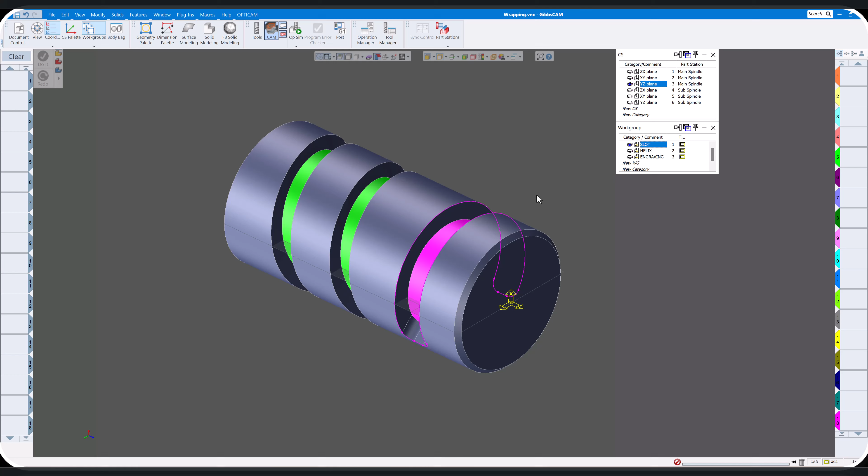Right click, go to extract edges. We'll leave that at 0, and there's our first wrapped geometry. Now this is just the geometry off the part - it hasn't been unwrapped yet.

So the next thing you want to do is select this, go to modify, go down to where it says unwrap - it's already been wrapped because it came in that way from the solid. Click on unwrap, and make sure you put the radius of the part. You want this on the top - this is a 3-inch part, so this will be 1.5 inches. Click on do it, and you'll see now this geometry is unwrapped.

Now if you want to get some dimensions on here, you can dimension this. We'll just dimension this right here - you can see that's 5/8.

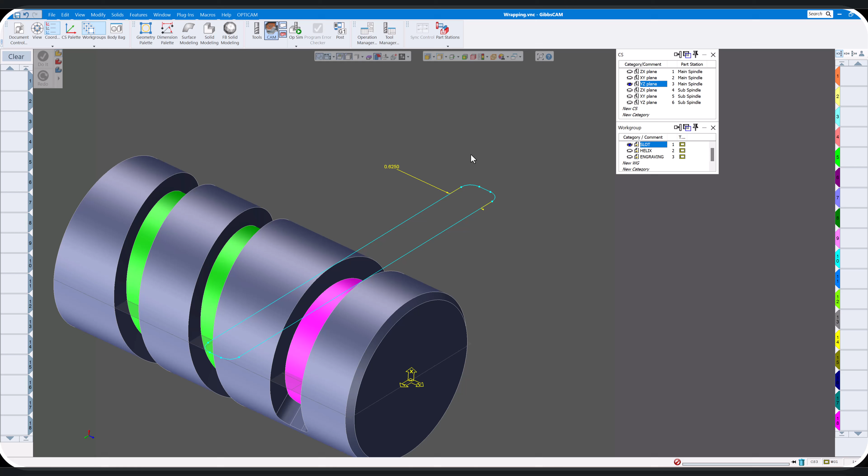Now if you want to know what the radius is on the part, notice I'll click on here to get the radius, and I'll click on here, but nothing happens, nothing shows up. So what that tells me is it's a B-spline. If you want to see if it's a B-spline for sure, hold the control key down, press L, and you'll see it labels everything there in Gibbs. You can see this is a B, so that tells me that's a B-spline.

So you don't have to convert this to arcs, but if you want to, here's a way to do it. I'm going to turn labels back off for a moment. I'm going to select this geometry, go out to modify and down to segment spline. I'm going to say make these arcs, and I'll give you 1,000th accuracy. So we'll click do it.

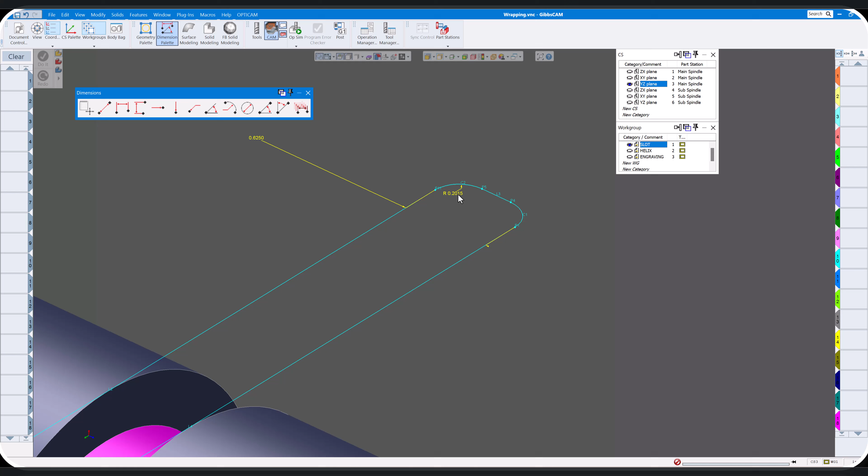Now if I turn Control L on, you'll see this is a circle now. Like I say, you don't have to do that, but there you go. So that's about a 0.2016 wide there. Okay, let me turn off those dimensions and Control L.

Okay, so let's create a tool. I already have my tools in here - I'm going to use a 3/8 end mill to do this. But one thing you want to do is there's this button right here that says wrapped work groups, and if you click on it, you'll notice it doesn't do anything. That's because this is not wrapped - we unwrapped it, but it needs to be wrapped in order for Gibbs to cut this slot.

So let's go to this slot here, right click, go to WG info, and make sure you click on this button that says wrapped. Now notice when I click on here, it wraps it around the part.

Remember, this is just a visual. It's not doing anything—it's just showing you what it looks like when it's wrapped versus unwrapped. So you don't have to have this wrapped when you start to put your geometry or toolpath on there. This is just a visual, okay?

So let's create a contour. Remember, this is not turning, it's contour milling with that end mill. The first thing I always do is go to the rotate command or tab and make sure we're on the correct coordinate system—in this case, the YZ plane. And we want to do, of course, polar and cylindrical.

That's good. Okay, now our part is 3 inches in diameter. Remember that this blue line here represents the center of the spindle—whether it's a mill or lathe, doesn't matter. So our stock is 1.5 inch radius, so 3-inch diameter.

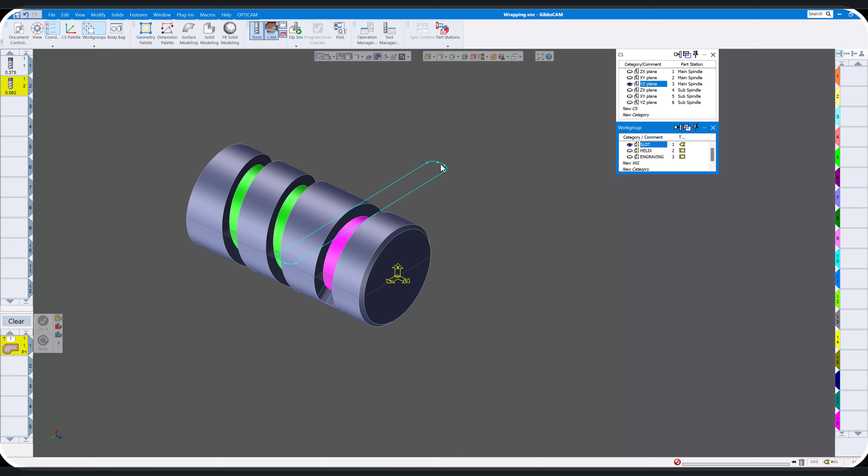Rotate's all good, polar and cylindrical. So now you can choose which side you want to start, whether there or on the end—that's totally up to you. I'm just going to start right here. Of course, click on this again, click on the inside there. If I can get that to take... okay, there we go. And click on do it.

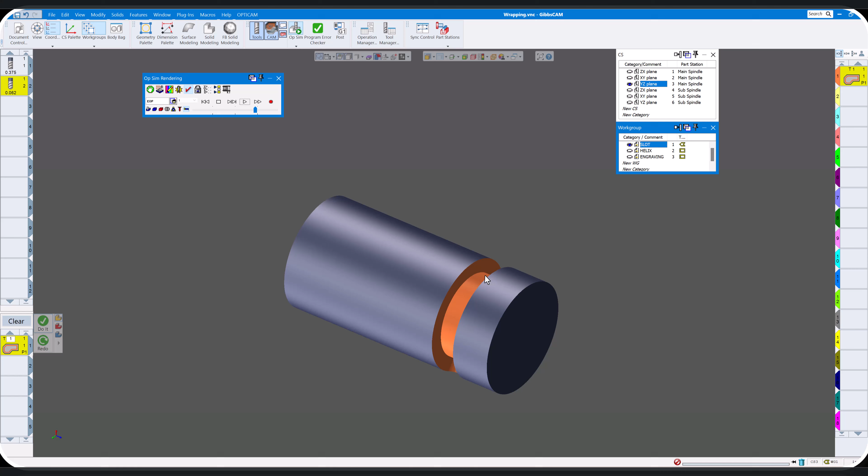And now you'll see it's wrapped around the part there. So let's do a cut part render and see where we're at. One thing to remember with polar and cylindrical: the tool will always be pointing to the center of the part. It's not going to shift off any amount in Y or anything else—this is always going to be to the center, so keep that in mind. You can use the other processes if you need the Y-axis to move off center, depending on where the end happens to be in relationship to the diameter of the tool you're using. So that looks pretty good.

Okay, let's close this. So now let's do the helix. I'm going to go to my work group that says helix. I'll just use an empty tile there to make our toolpath disappear. And again, YZ plane, helix. I'm going to just double check here to make sure that's not clicked—it's not. So again, right click, extract edges, and there's our helical geometry there.

And again, I'm going to select the geometry—let me turn off my cam. I'm going to select the geometry, go to modify, and again, unwrap. And again, the radius is going to be 1.5 inches because our part's 3 inches diameter. And there I have my unwrap geometry for the spiral.

So now, as you can see, this button up here isn't doing anything yet. So I want to go to my helix work group, right click, click on wrapped. Now notice if I click on this now, it shows you wrapped and unwrapped. Okay, pretty good. Open up our cam again.

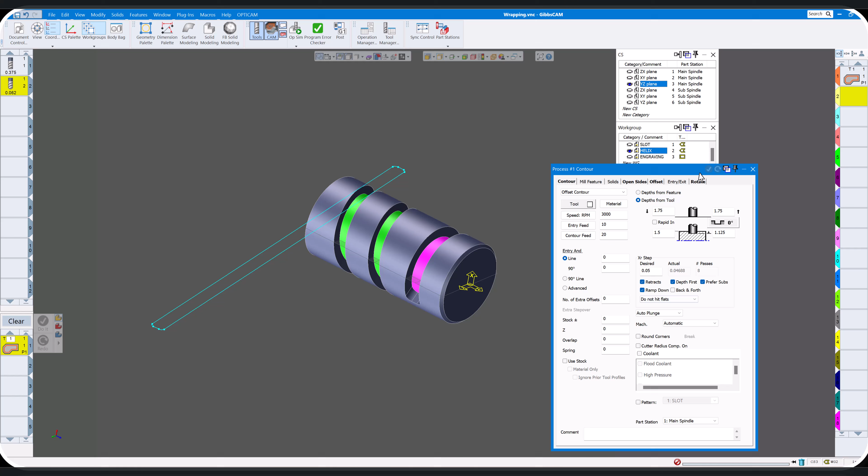I'm going to use the same tool and basically everything here is the same—ramp down, all this stuff. So again, you can decide where you want to start, that's up to you. And we'll click on here, we'll climb mill and click on do it. And now we have our helical spiral in there. So let's play.

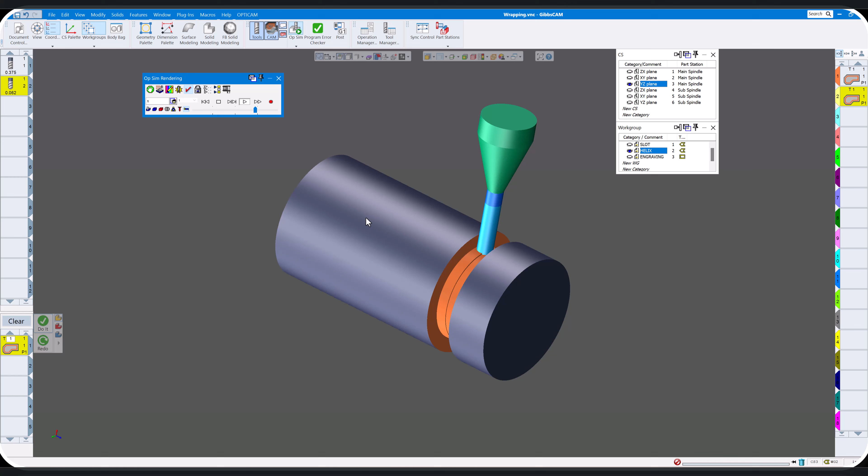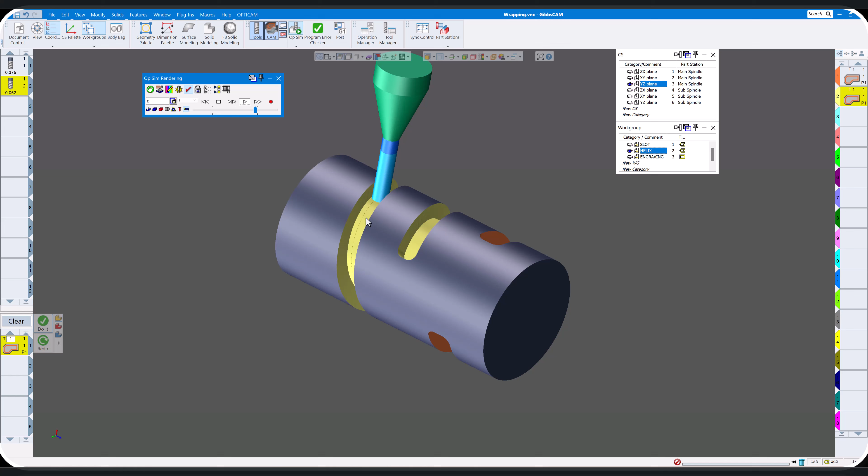And of course, when it gets to the bottom in Gibbs, it'll stay at the bottom without ramping in when it does the final pass. And our final pass. Okay, so you can see now we have the partial slot, and our helical—all looks really good.

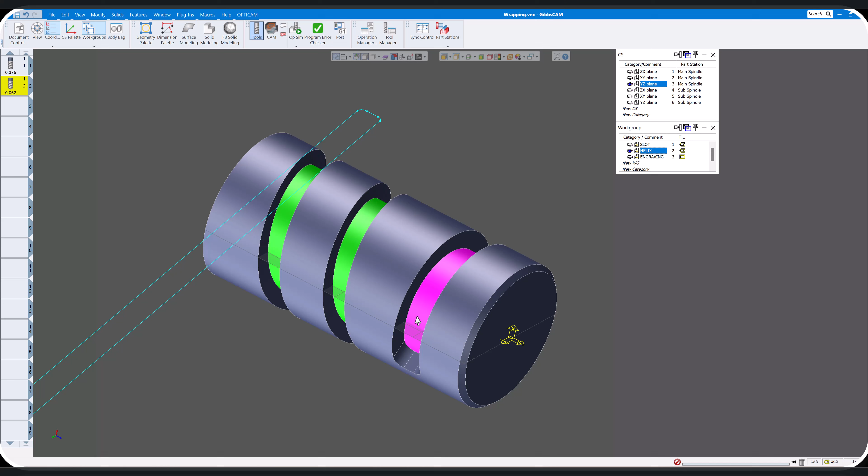Okay, that was 2 examples of if you bring in a part. Turn off some of this stuff here. Bringing in a part that already has the geometry, or the model already has what it wants to be, like the wrapped polar and cylindrical already in there. So that's why you need to do the opposite: first unwrap it, go to your work group after you've unwrapped it, then check this box. Don't do this before, otherwise you might get a double helix wrapping around there, so don't do that.

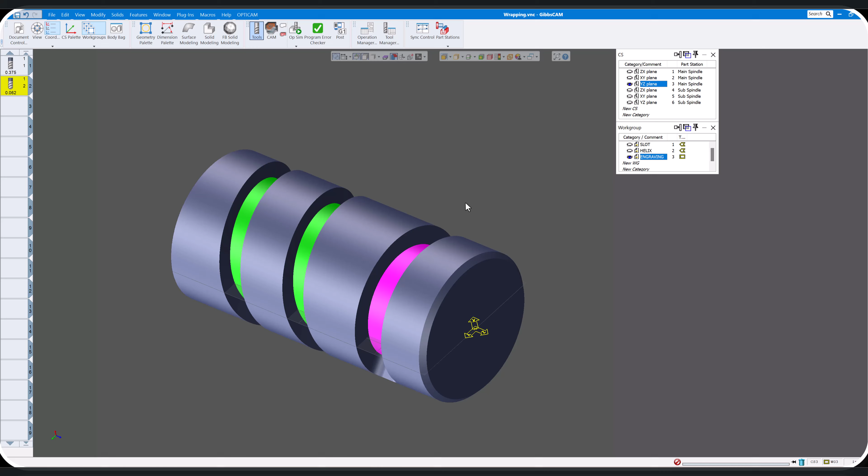Okay, let's go to our last one here, which is engraving. I want to engrave some numbers on the outside of here. Now, of course, you'll see—let me turn off edge selection—there's nothing in the solid model already, so I can't unwrap it. I don't need to unwrap it. So let's just go to our geometry palette.

Let's go to our engraving, and I'm going to choose more part. The reason I choose more part is it's just stick figures, made up of G1s, G2s, G3s. Any of these others you choose will all be splines. Of course Gibbs will engrave it just perfectly, but your code's going to be a lot longer because these are all made up of B splines.

I haven't really seen any others in Windows that are not B splines. So just keep that in mind.

We're going to go half inch back, 1.5 inches on the X, because remember our part's 3 inches in diameter. And center - usually I have the name wrapping, but usually I put some spacing in there, otherwise sometimes the end mill overlaps the other geometry, so usually I'll put a space in there. So if I click on Do It, you'll see I have my geometry nice and flat, even with the 1.5 inch radius there.

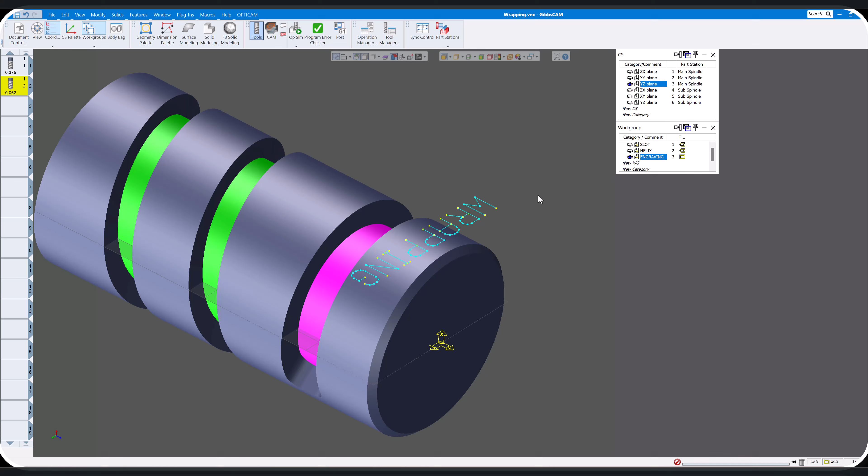Now, instead of unwrapping, this time I want to wrap it, and you don't really need to go here and wrap it here. We're just going to go right to engraving, right click, go to WG Info, make sure you click this button that says wrapped. Now if you click this button up here, you'll see it wrapped around the part. Looks perfect. Okay, open up our cam.

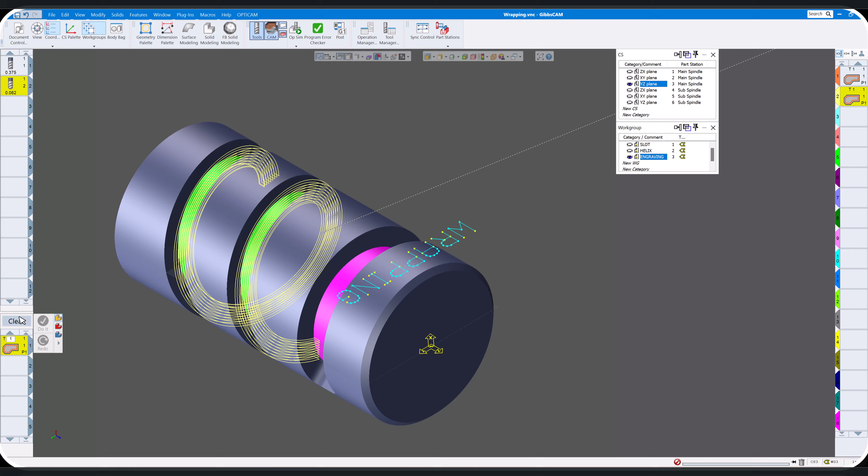This time we're going to use the 1/16 ball end mill. I find ball end mills work a lot better when engraving because it doesn't leave burrs, but if it's really small lettering, you need to use an engraver, then it usually brings up a little burr, but if you can stay with a ball end mill, you'll be a lot better off.

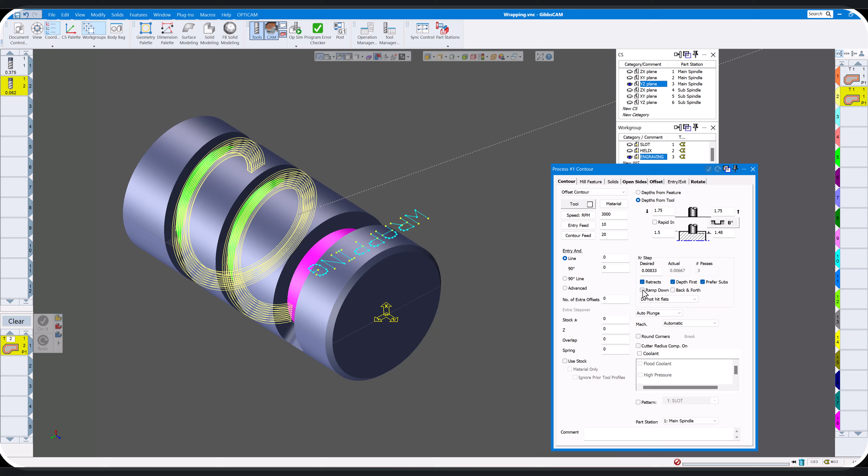Okay, so here we have 1.75 is our clearance, 1.5 inches is our material. I don't want to engrave that deep, so I'll put in 1.480 there. No entry and exits, nothing like that. I don't want to do a ramp down. And make sure, of course, you're on the right plane, polar and cylindrical.

Now, easy way to do this is just turn off the solid, just hide the solid. Choose an empty tile over here, okay? And I'm just going to hold the Shift key down, put a window around the engraving, and click on Do It. And you'll see when we render this...

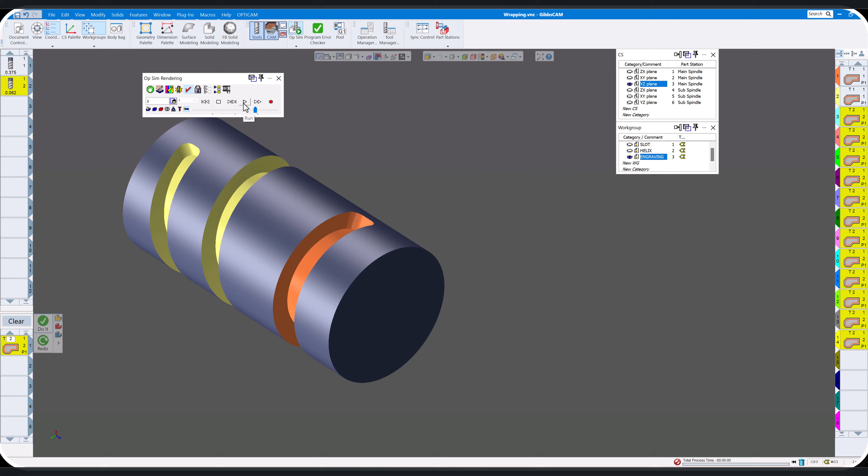And there's our wrapping. So one thing to keep in mind when you're doing engraving on here is you can see it created quite a few processes on here. You really don't need all those.

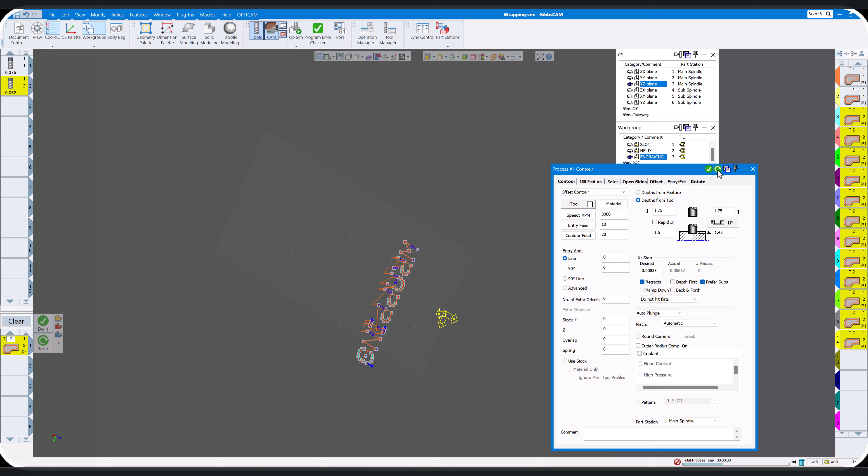So an easy way to change that is just to turn off rendering. Just click this, uncheck this depth first, and then click Redo. You'll see that changes it to every operation for every letter, just down to 1. And again, the rendering is going to be exactly the same. Just play it all the way through again.

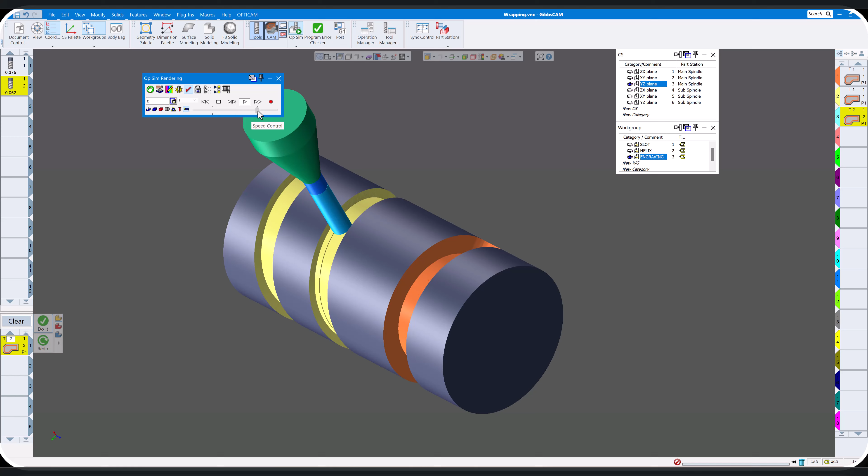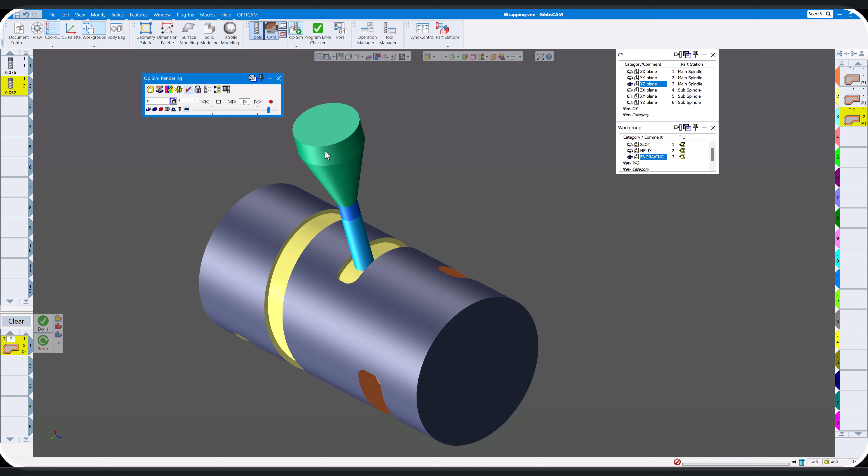Okay, we'll try to slow it down when it gets to the engraving. And there's your engraving. Again, one last time, this time I'm going to click the stop sign and say stop before operation 3. This time we'll fast forward till we get to 3, just so you can see the end. All right, now we'll slow it down.

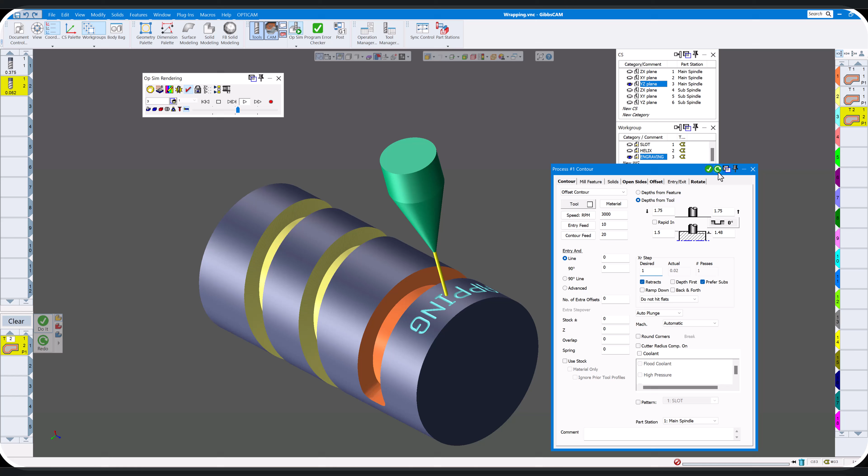Now the reason it's doing it a couple of times is because I have the desired step here kind of small. So let's just put in 1 inch there, but Gibbs will actually just do it at 20 thou. So let's just redo that, and again, fast forward. Let's rewind, fast forward. All right, this time it's going to do it just one time.

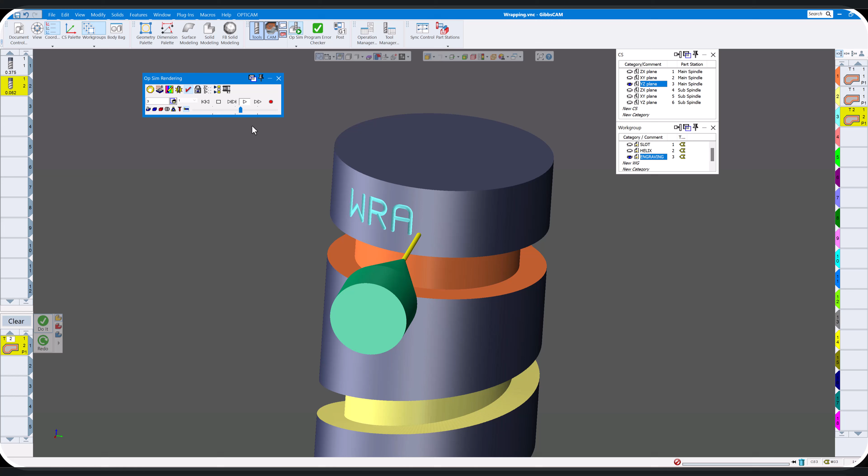So there you have it - easy way to cut slots and engraving. And if you needed to have the Y move offset, depending on the size of your end mill, depending on how your solid is in the print, you can always change this to change the process. Change this to either radial contour or radial pocket. This is a pocket, and of course this is just radial, but this will move the Y-axis off.

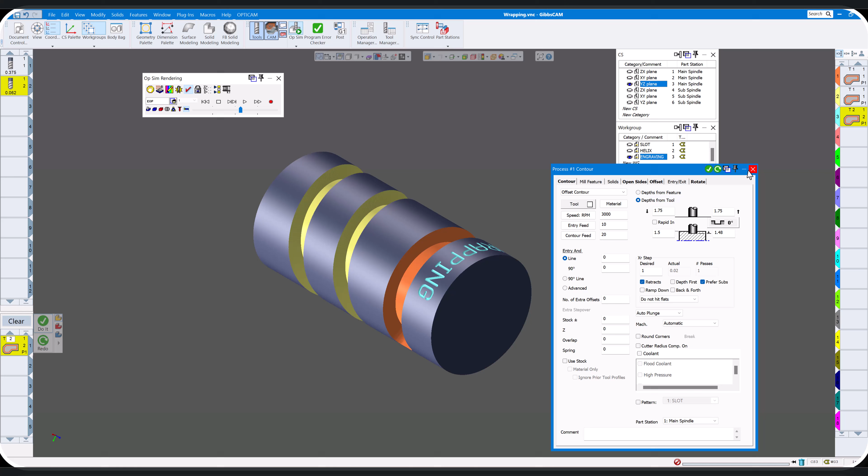If you have a Y-axis, if you have a lathe that doesn't have a Y-axis, then of course you can't use this. But if you have a Y-axis, you can use this, and it will shift the tool off center, so you have the walls exactly how the print shows. But anyway, that's another way of doing it. So thank you for watching. This should hopefully clear up any questions anybody has on how to do polar and cylindrical. And thanks for watching.